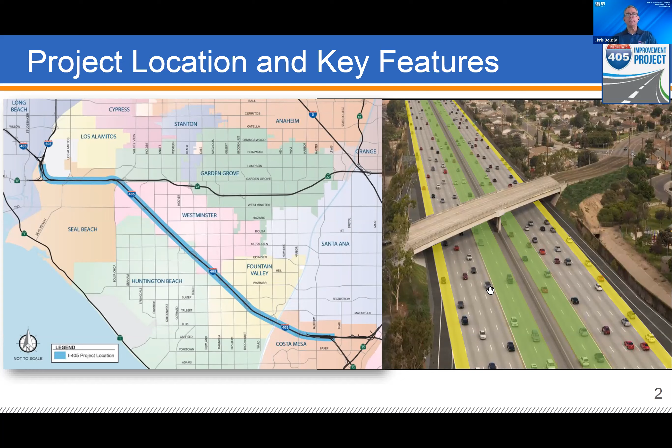On this slide you can see some of the major features of the project. We are replacing 18 bridges, widening 4 others, and constructing a new express lanes connector between SR 73 and I-405, in Costa Mesa. We're also building more than 150 walls throughout the project area, and there will be new bike lanes and sidewalks on all of the replaced bridges.

The overall cost of the project is $2.08 billion.

Now I'm just going to jump into an update on construction activities. If you have any questions about that, we can take those later. Any questions about what I just discussed?

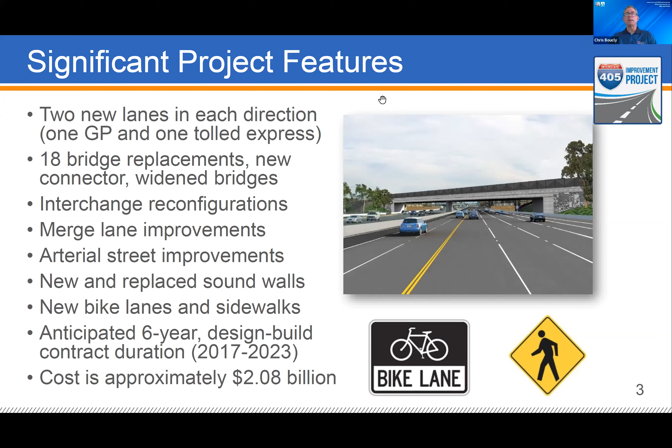Let me move the slide a little bit and show you some photos. We're really excited about the fact that we're more than 60% complete with the project, and we have more than 1,000 workers involved each day. These next several slides will display some of the construction progress.

Of the 18 bridge replacements, 11 are being done in one phase and 7 are being done in 2 phases. A one-phase bridge is closed to traffic during construction — an example for those in the area is Edinger. Two-phase bridges remain open to traffic — an example close by would be Magnolia, which was just completed in Fountain Valley. That's one of our 2-stage bridges, and they work on one half at a time, which allows the bridge to stay open to traffic during construction.

On this slide you can see the construction of the Fairview Road Bridge and realigned ramps. I'll step back a bit — these are all bridges we have completed so far. We have 5 bridge replacements open to traffic. The first one to open was Slater, then Bushard, McFadden, Talbert, and Magnolia. Again, Magnolia is the first 2-stage bridge we completed that is fully open to traffic.

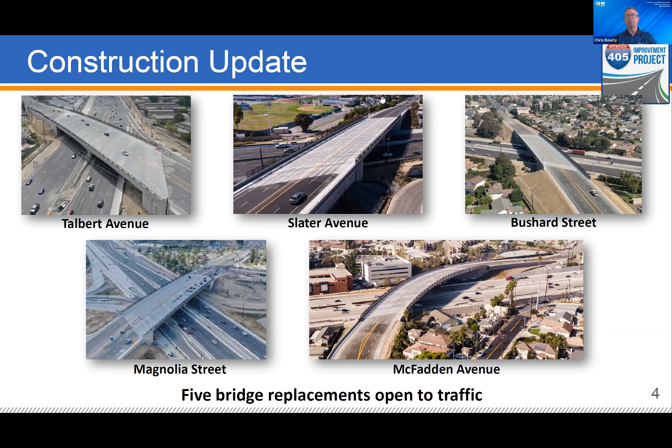Now on this slide, this is the Fairview Road Bridge, at the south end of the project. We've finished the first half, and construction crews are working on the second half. Ramp construction is also being done at all interchange ramps, as ramps are being realigned as part of the project. The Fairview Road Bridge is expected to be fully open to traffic by the middle of next year.

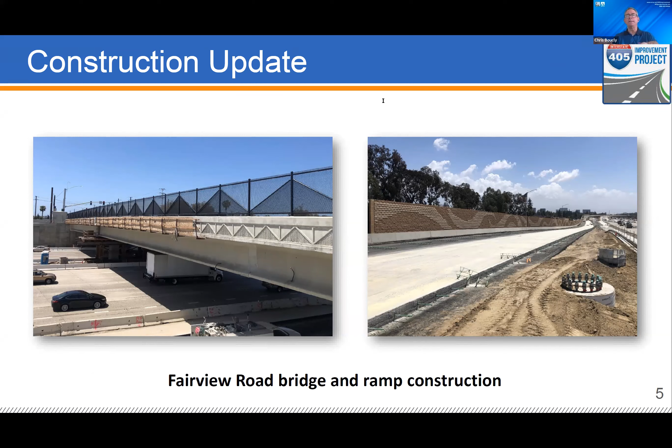On this slide, the photo on the left shows reconstruction of the Heil pedestrian overcrossing in Fountain Valley — right at the nexus of Fountain Valley, Westminster, and Huntington Beach. This pedestrian overcrossing is expected to open later this year. The photo on the right shows reconstruction of the Edinger Bridge, anticipated to open to traffic around the end of this year. Once Edinger opens, we'll be starting work on the Newland Bridge.

I'll stop here for a second and talk a bit more about Edinger, since it's right near the beach. The bridge deck, which is what everybody drives on, is expected to be poured next week. Much of the bridge has been constructed — the main portion of the bridge, the concrete for it, has been poured.

When we pour the bridge deck next week, that's a major milestone in construction. Much of the bridge is done at that point, the major structure. Once that deck is cured and the forms are removed, the false work is removed. False work is that temporary support structure in place that supports the bridge while it's being constructed—the steel and timber beams you see as you're driving under the bridge.

The contractor's aiming for late August or early September to remove that false work. It'll take a couple of weeks to do, and it'll require directional freeway closure. So they'll do one side, lower everything, remove it, and then come and do the other side.

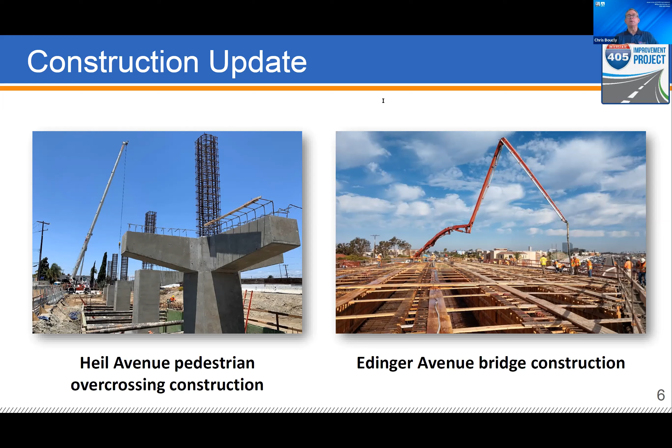On this slide, it shows in green the 5 bridge replacements that are open to traffic. We mentioned earlier that we have 18 bridge replacements total. We've got 5 that are open—I showed you some photos of those earlier. The only bridges that have not yet started construction are shown in red, and work on those is expected to begin either later this year or in early 2022. You can see Springdale and the connector, that new Express Lanes connector that I mentioned.

As you can see from everything in orange, we have a number of bridges under construction. And that's just part of it—this is a 16-mile-long project, but we're widening on both sides, so it's actually 32 miles of new pavement. There's a ton of utility work that has to occur with that. There are several bridge widenings that I mentioned earlier, and most of those are expected to be complete as well. But by the end of this year, which we're really excited about, we expect to have 9 of those 18 bridge replacements fully open to traffic.

This map, by the way, includes a key to all of the features of each of the bridges—bike lanes, number of lanes, sidewalks, etc. That's included, as Nikki mentioned, and you can get a link to them in the chat.

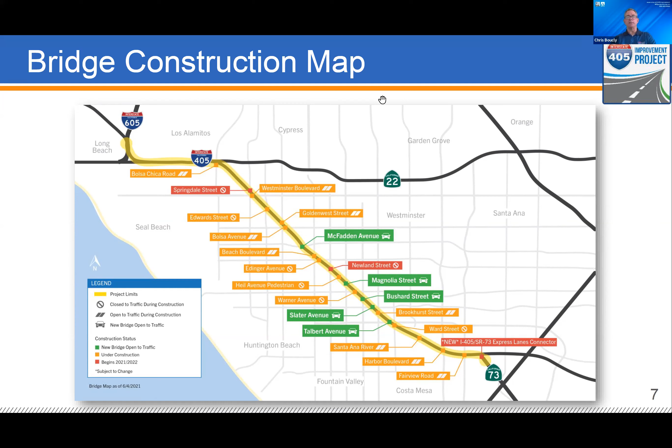Now a little bit about Beach. This slide shows construction at Beach Boulevard. I really like this overhead aerial shot on the right—it really shows the extent of the work at the interchange, which we'll delve into more in a moment. The photo on the left shows some of the aesthetic features on the walls under the freeway bridge. This is important because each of the cities was involved, from Costa Mesa through Fountain Valley to Westminster, Huntington Beach, Seal Beach.

All of the cities were involved in the development of what's known as the POM, a document that outlines the aesthetics for the project. The cities got an opportunity to provide input so that there's some uniqueness to the aesthetics. In the Beach Boulevard area in Huntington Beach, we've got waves. We've also got other locations with flowers and birds. More towards Seal Beach, we've got marine animals. It's pretty cool throughout the whole thing, and it's a lot of work to make sure those forms are done correctly and that the aesthetics look really good.

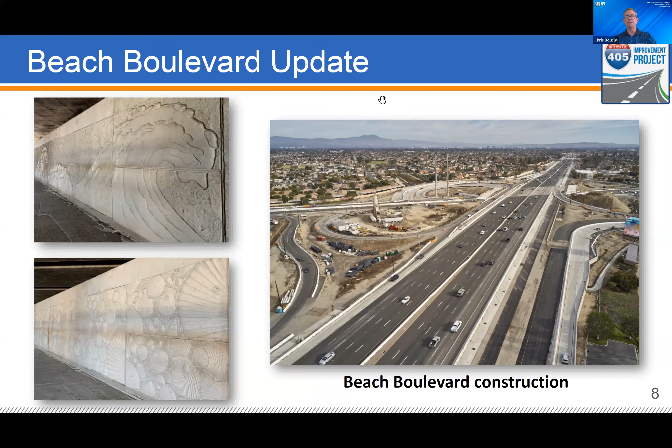Now let's get a little bit more deeply into this update on Beach Boulevard itself.

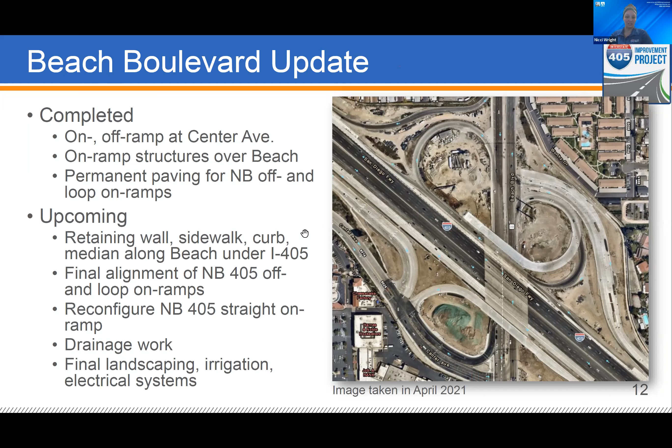Here's the northbound 405 off-ramp, north is down and to the right. Coming down this new ramp, you ultimately have 5 lanes - it doesn't start out at 5 lanes, it opens up to 5 at a certain point on the off-ramp. You have 2 dedicated left turn lanes, 2 dedicated right turn lanes, and the center lane will be either left or right. It will be much better than before - wider, more capacity, and safer because you'll be able to stop or have a green light and continue through without worrying about merging with cars coming northbound on Beach Boulevard. Hope that helps.

For Michael, you had the question about Magnolia - no left turn to southbound Magnolia from the northbound off-ramp. We should investigate why that is. Yeah, we can look into that - that definitely would be helpful.

Kimberly was asking about the wall along the northbound off-ramp and suggested that maybe another analysis could or should be completed. The environmental study is the authoritative document for these studies, for the noise analysis. We can share that information with you and how to access it. There are no new studies planned, there won't be any new studies associated with this project. If there's a future project, then that's possible, but Caltrans won't reopen the environmental process or do anything new with respect to the environmental analysis of the walls in this area.

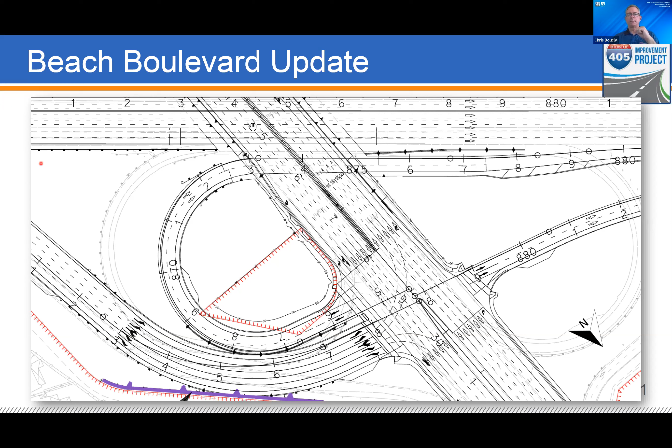Let's see here if I can share this part of my screen as well, maybe. All right, I'm going to stop sharing for a moment and share again. There we go. All right.

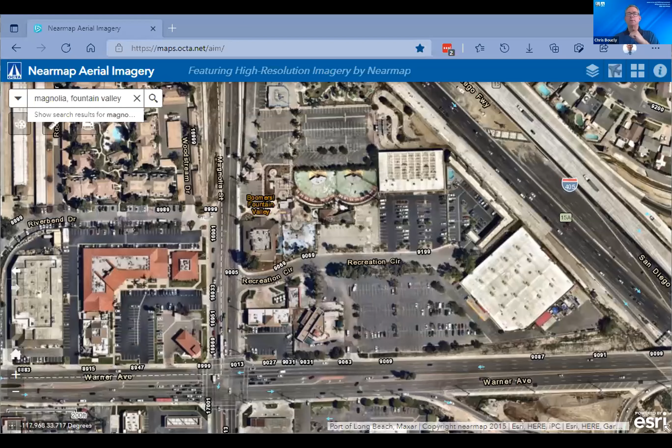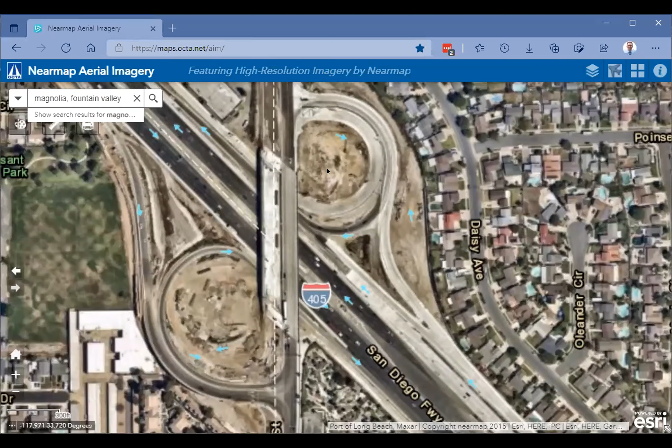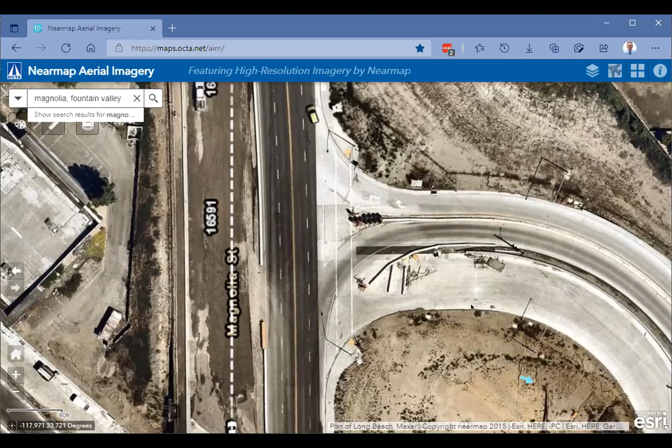And then as you can see here, these are aerial photos. These are where I get the aerial photos from, April. As you can see, this is old because Magnolia is open. I think this was it, Michael, Nikki? Let me double check here, about Magnolia. So this is that right turn only. Yes.

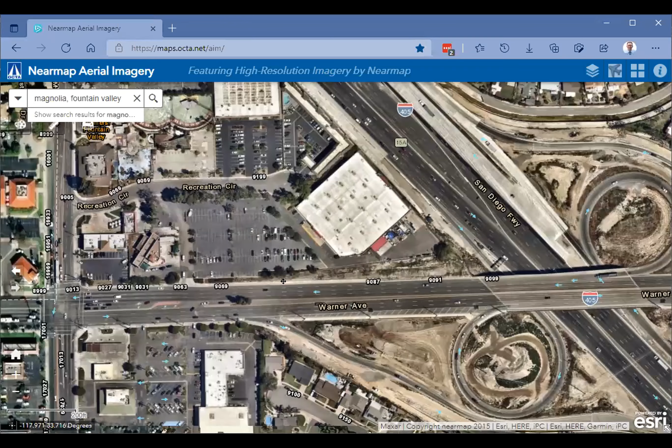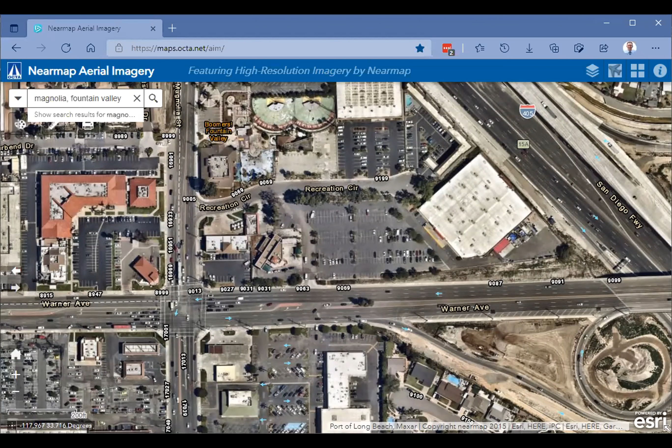And I imagine because it's not signalized, there may be an issue there. But the idea would be that folks would exit at Warner. The configuration of this interchange will be different as well, but they'll be able to go westbound on Warner and get to Magnolia. Hopefully that's the case. Okay, so you're right about Magnolia, there is no turn to southbound Magnolia in the existing conditions. Okay. All right.

Let me see if we have any more questions. Not quite yet, I see some items in the chat.